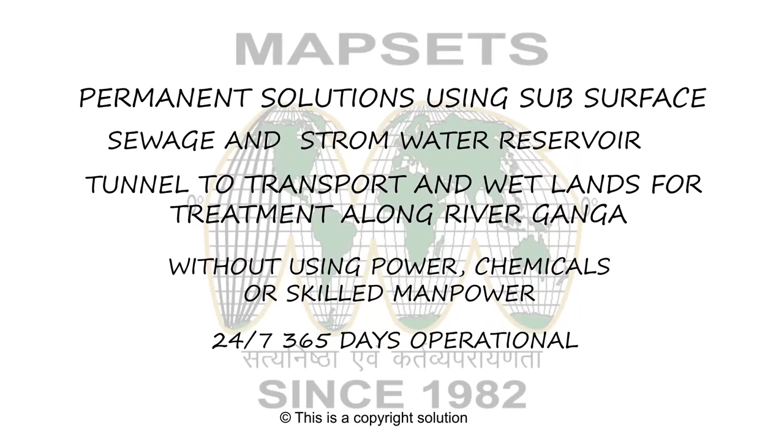This copyrighted concept will be customized as per the topography of all other cities. Mapsets brings a permanently sustainable solution to treat municipal, industrial and storm-water sewage using an engineered tunnel to transport the sewage outside the municipal city, and treatment using wetlands for cities and towns on the banks of River Ganga without using any power, chemicals or skilled manpower. Operational 24/7 and 365 days.

Mapsets' basic philosophy is to collect all types of wastewater, including storm water, into an underground tunnel reservoir. This underground tunnel will connect the existing sewage network and enable the least amount of sewage blocking, which will drastically reduce sewer maintenance and at the same time eradicate surface water logging. With no water logging, the other infrastructure like roads and other utilities do not get annual seasonal damages. The underground engineered tunnel reservoir will use no power to transport all the surface water sewage outside the city. This will gather huge carbon credits.

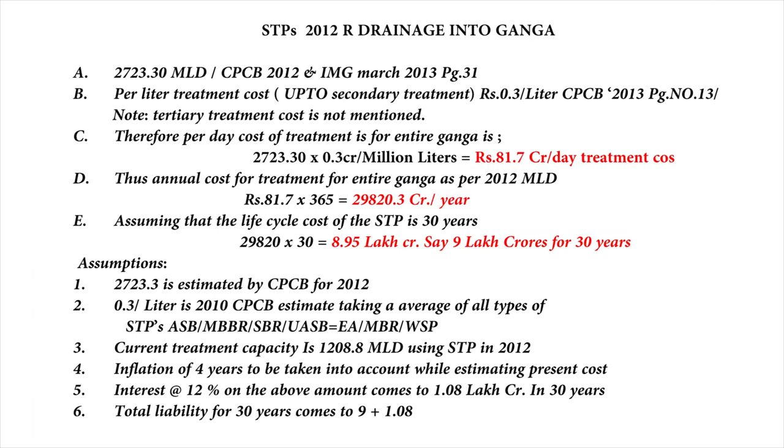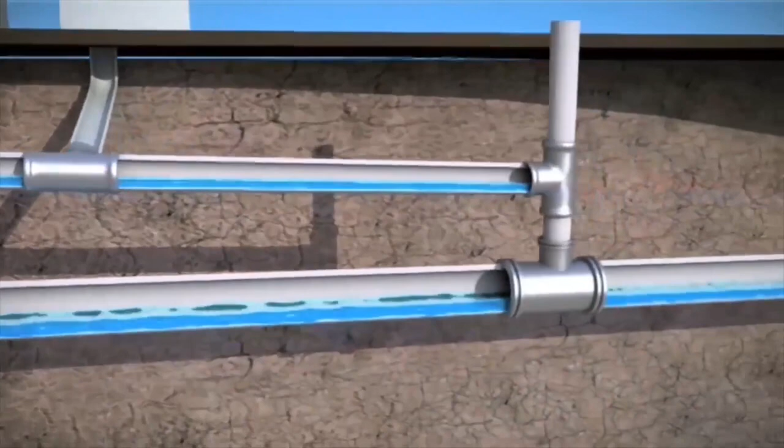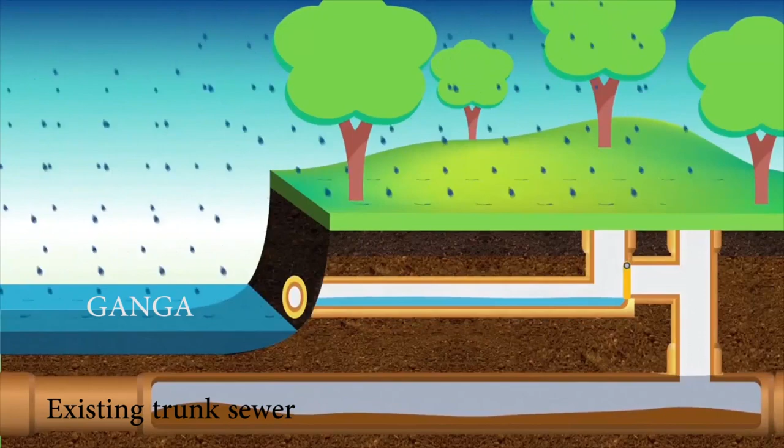At present, 80% of the water supplied in households and industries is drained into the sewage network system, which connects to a trunk sewer having underground screening chambers to filter the solid waste. This is transported using gravity or pumping to a sewage treatment plant. The pipe network gets choked during rainy seasons due to sludge, solid waste and design flaws. When the trunk sewer overflows, the untreated sewage empties itself in the lowest height of the River Ganga.

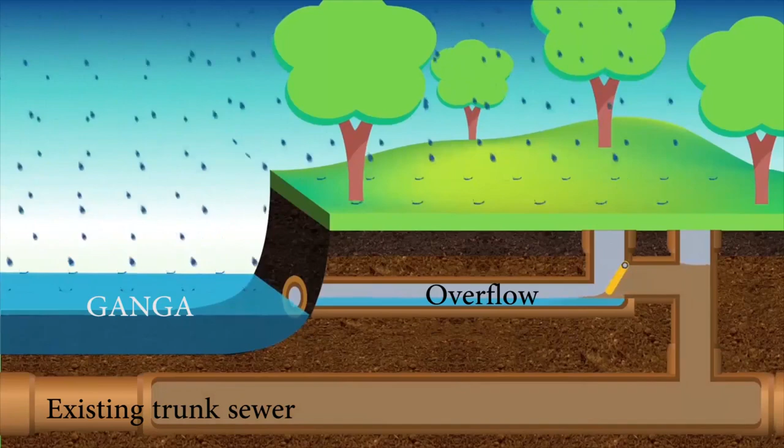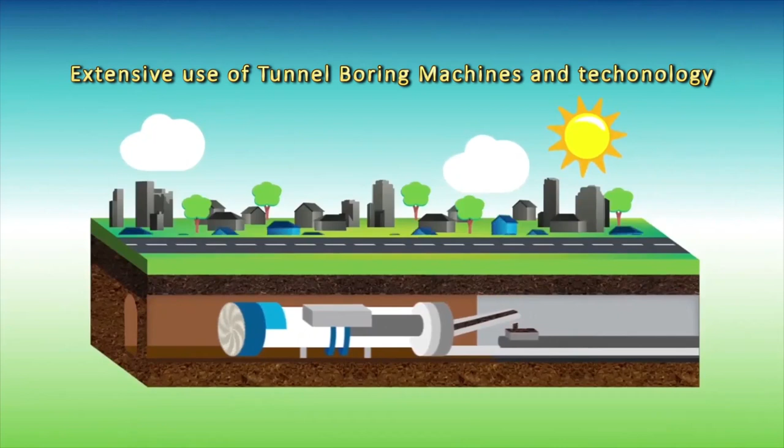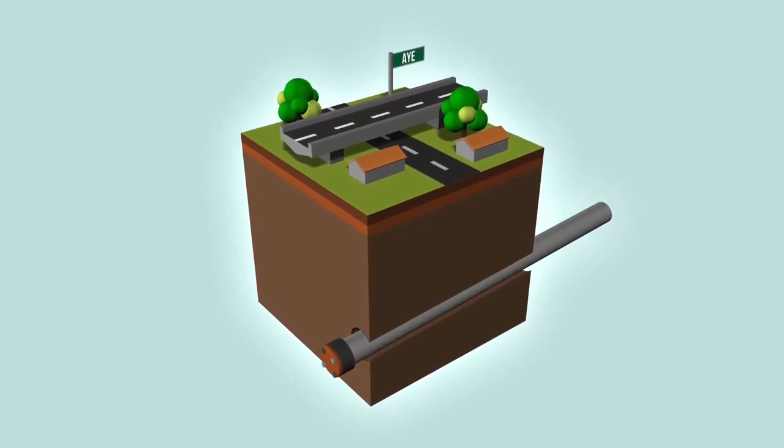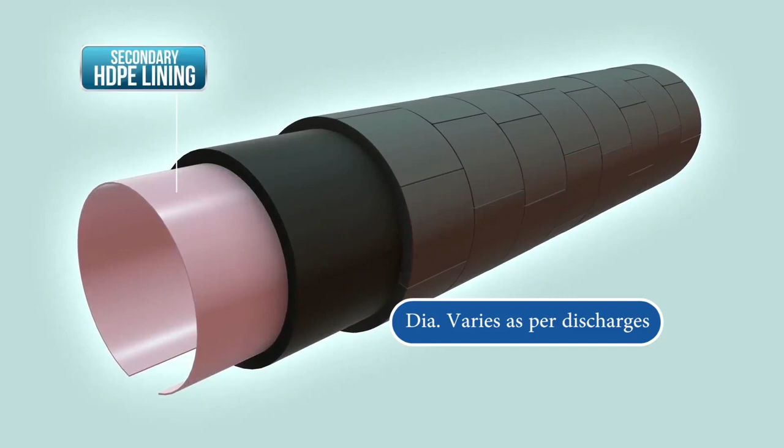Mapsets has proposed using tunnel boring machines. This tunnel reservoir will be designed as per the projected MLD of 100 years. If the topography permits, the tunnel can be constructed below the River Ganga to service the city on the opposite bank. There will be no disturbance on the surface during construction, and it can be carried out during rainy seasons also. The tunnel will be a precast, section by section, 3-layered tunnel casing. The innermost lining will be of HDPE non-corrosive material, with optical fiber to monitor the flow and maintenance cycles.

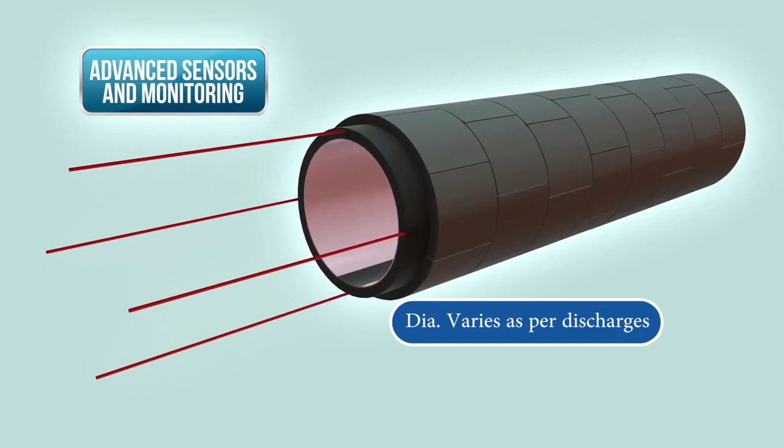The diameter of the tunnel will vary from 4 to 6 meters depending on the discharged MLD, the topography and the pressure needed at the start of the wetlands. Average cost of construction of the tunnel will be Rs 50 crores per kilometer, tunneling approximately 30 meters per day. There will be vertical shafts to maintain and clean this single structure. There will be additional bypass structures with easy accessibility from the top. The design will be such that most sludge will collect only in these sections of the tunnel.

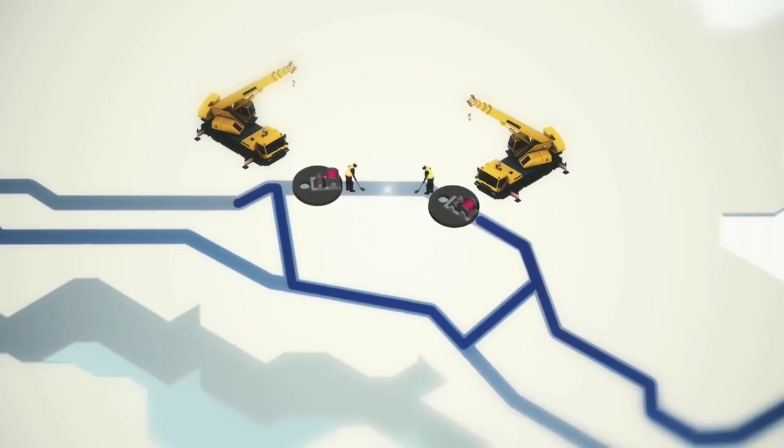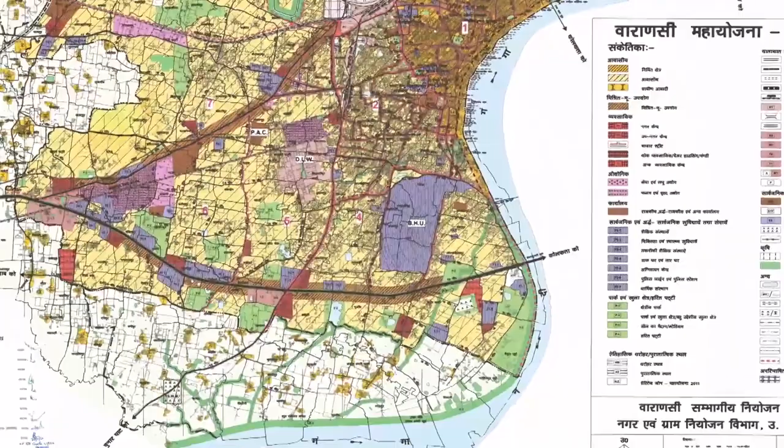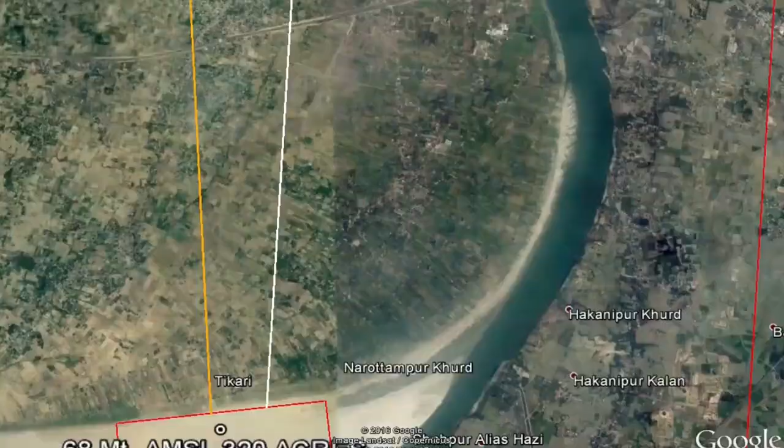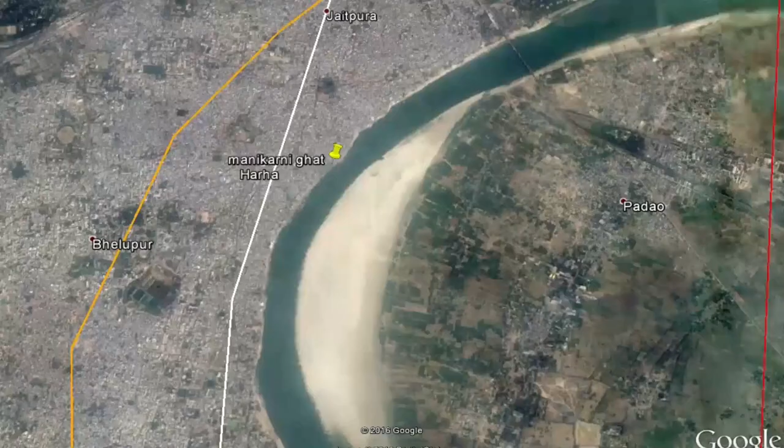Mapsets reviewed the Ganga Basin and undertook a pre-feasibility study of the city of Varanasi. In our report, we begin by identifying the land for constructing wetlands, a dry patch of riverbed marked in a red rectangle at 68 meters above mean sea level with over 320 acres of land available. In our smart sewer system we have proposed 100% collection with a life of 100 years. We have indicated two alignments, one in white which is a straight alignment, the other a curved alignment in yellow covering a larger part of the city.

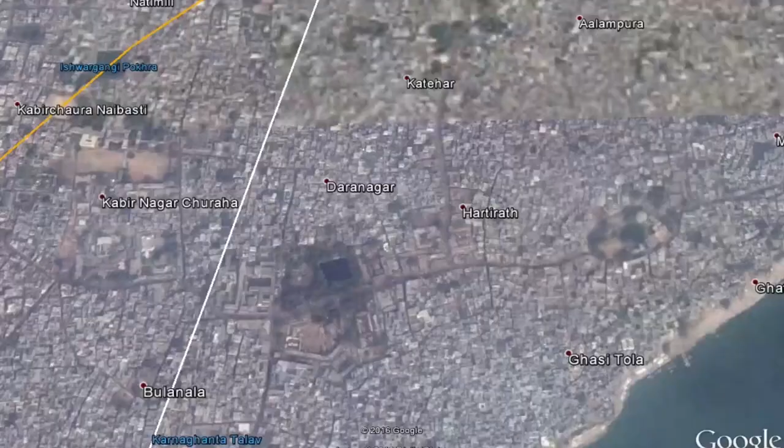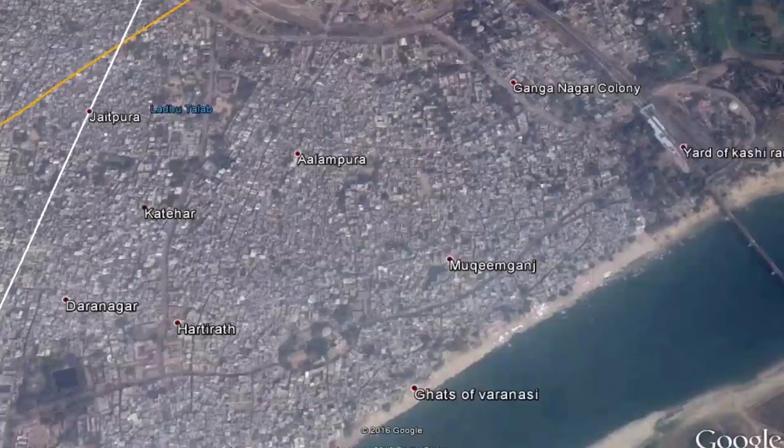The city information was collected by referring to the city development plan, and the existing sewage network was studied. According to the Interministerial Group report of March 2013, Varanasi has a total area of 10,058 hectares, and the unsewered area is 8,432 hectares. There are 23 drains emptying raw sewage into the Ganga River. 84% of the municipal area is without any sewage network. The latest figures indicate a discharge of approximately 300 MLD in 2017. There are a total of 20 square kilometers of wastelands in the district.

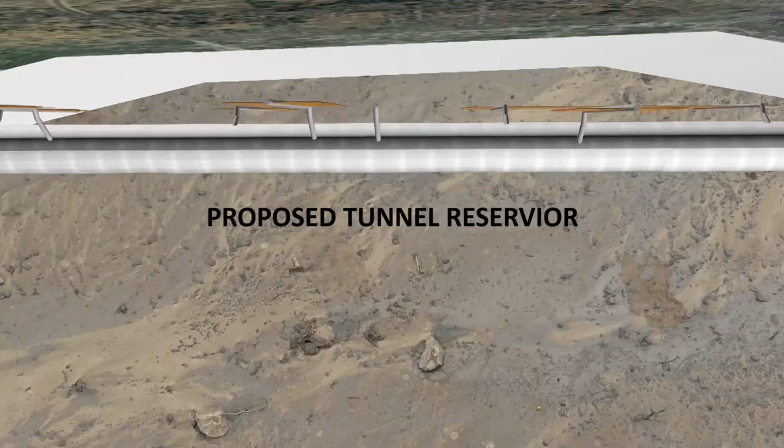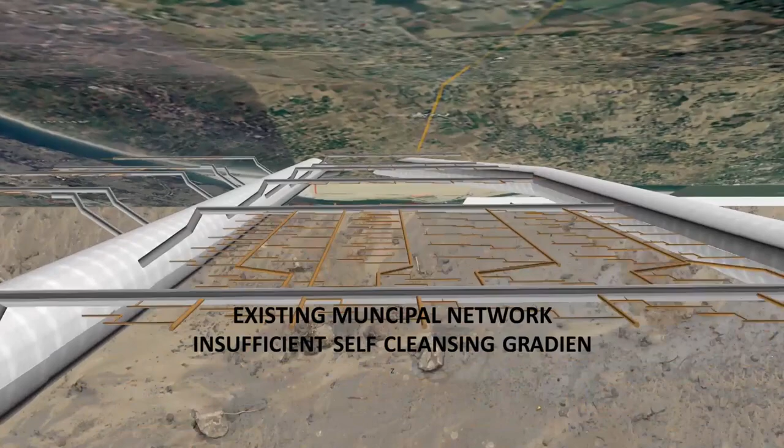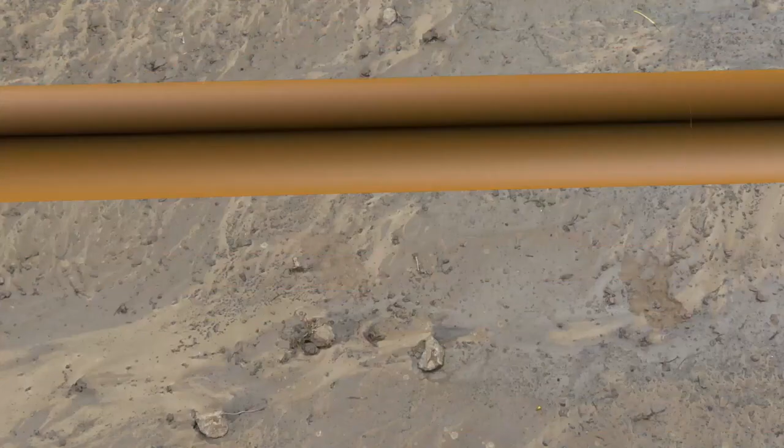The ancient city of Varanasi is very densely inhabited. The proposed engineered reservoir needs no gradient and has the other opening on the north of the Gumti riverbed. There are two areas identified of 7 acres and 8.5 acres each. In case these lands are unavailable, the tunnel can be taken further to a place where land categorized as wastelands as per the Wasteland Atlas can be allocated to make the wetlands.

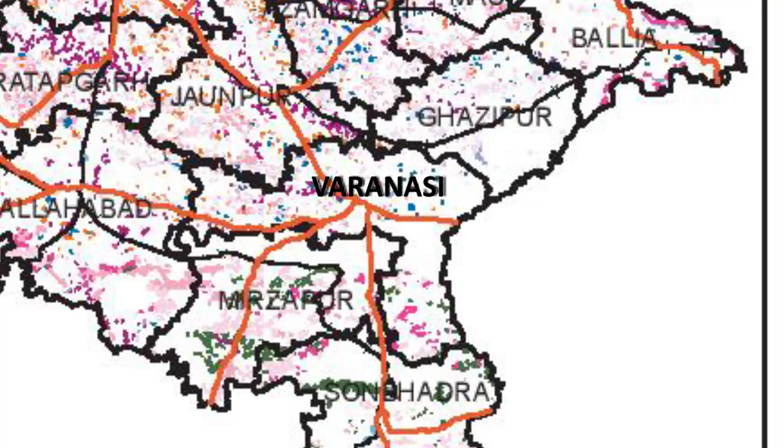The following simulation is for schematic representation only and the IPRs are owned by their respective owners. The tunnel and the wetland are uniquely designed for each city. The discharge and pressure for a wetland are maintained inside the smart tunnel reservoir. A revenue generation model with a break-even of 12-15 years through production of particle boards etc. is inbuilt, which will reduce tree cutting, apart from providing a huge employment opportunity.

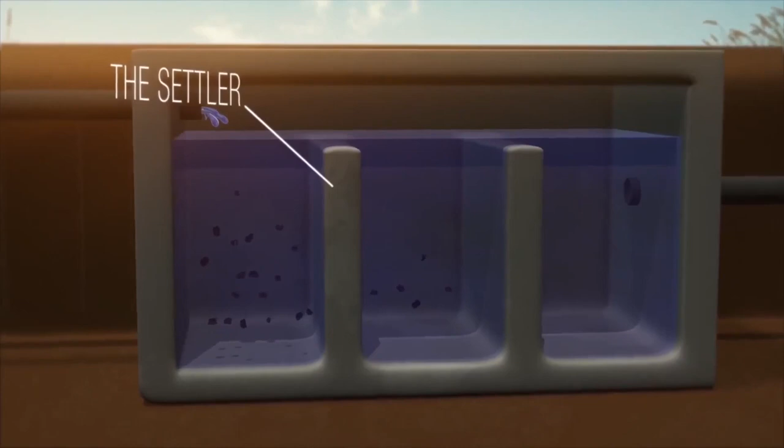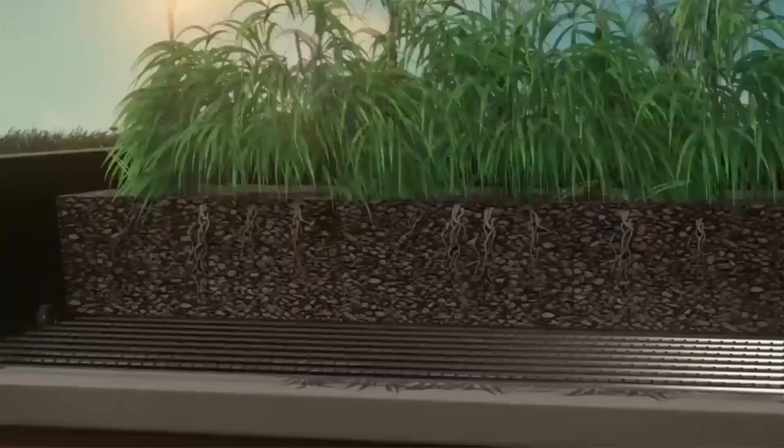Constructed wetlands are a viable treatment alternative for municipal wastewater, and numerous studies on their performance have been conducted. A well-designed constructed wetland should be able to maintain the wetland hydraulics, namely the hydraulic loading rate and the hydraulic retention time, as it affects the treatment performance of the wetland. We propose a wetland process where the sewer flows through surface settlement tanks and then moves into the wetland cells. These cells are constructed for a horizontal subsurface flow of sewer through gravel and Typha vegetated tanks.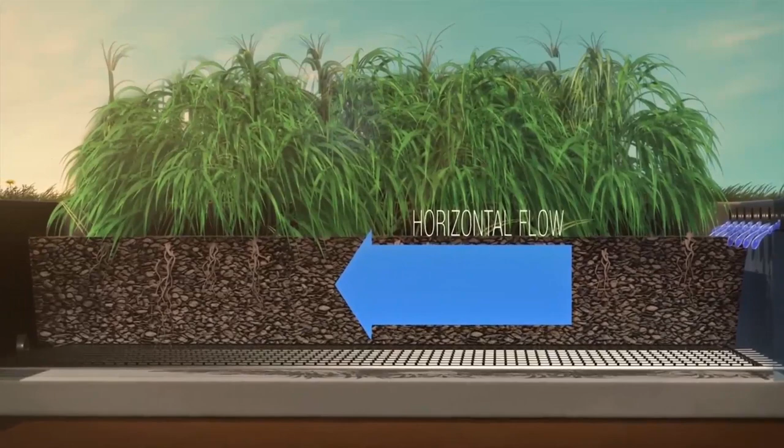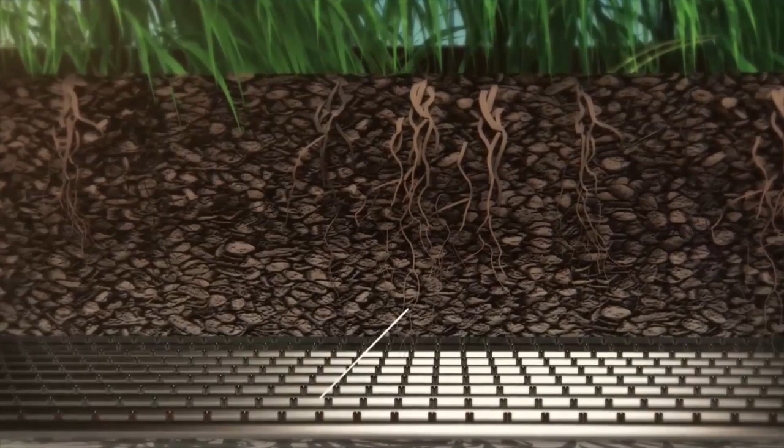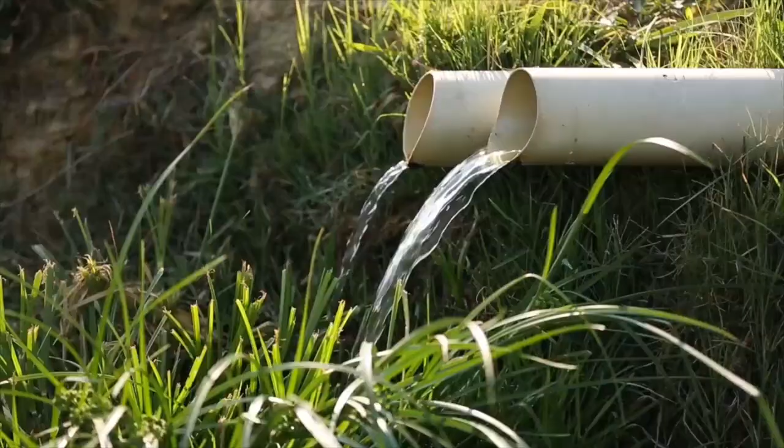A filtered system has 3 stages or zones. There is an inlet area where water flows through crushed bricks and stones. Then, water enters a treatment zone in which the same media are used, but where the different plants are located. The water then enters the outlet zone. Once treated, the effluent can be used for irrigation and fisheries, or drained into the Ganga to maintain the environmental flow.

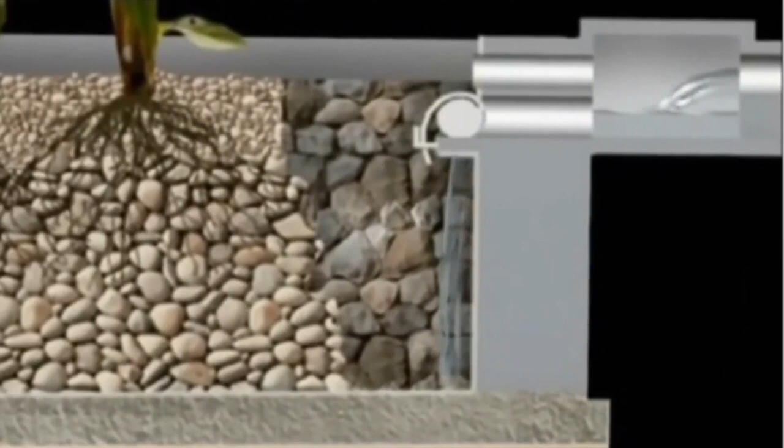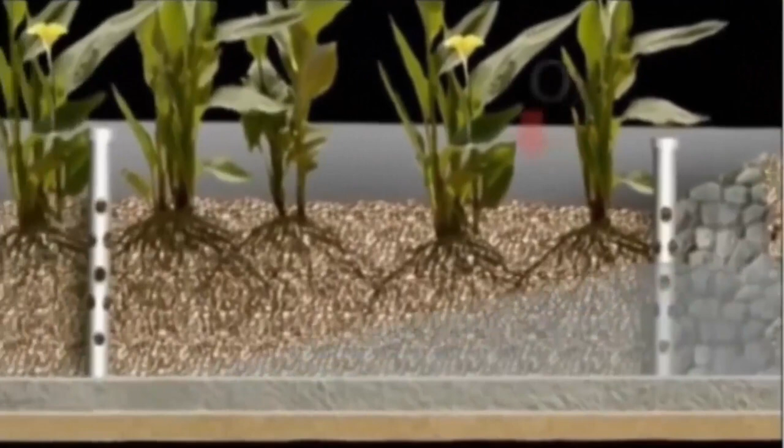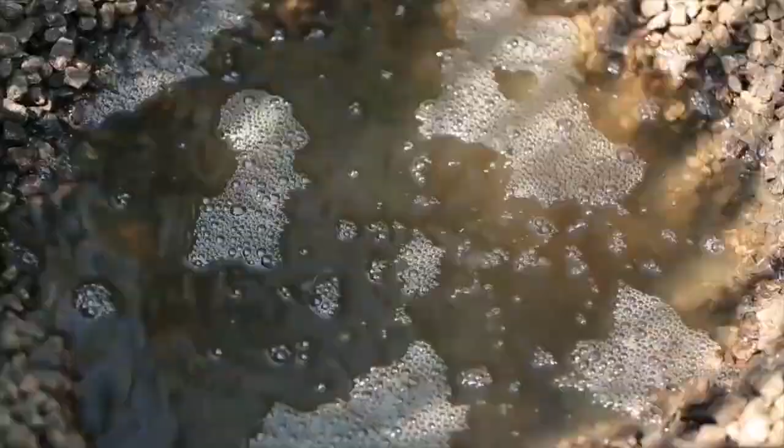Prototypes of wetlands made on a smaller scale, cleaning approximately 1 MLD of sewage in approximately 2 acres, have resulted in just 1% energy requirement, zero chemical application, zero sludge generation, 50 to 65% reduced treatment cost, no skilled manpower requirement; harvested biomass is transformed to particle boards, and waste to power generation. It has a life of 100 years. They bring down the BOD to less than 10. TSS 99% removed, pathogens 99% removed, fecal coliform 99% removed, iron 99% removed, chromium 99% removed, lead 99% removed.

The most important aspect in comparison to the power and technology hungry STP is that these wetlands bring in huge carbon credits to India.